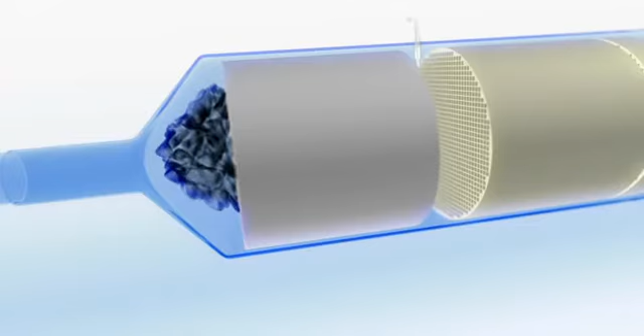The harmful gases produced by the heavy-duty diesel engines are purified in the exhaust after-treatment system, consisting of a diesel particulate filter for the soot particles and a selective catalytic reduction catalyst, also called SCR, for the nitrogen oxides. BASF engineers are working jointly with their customers at the truck manufacturers to improve the performance of the whole exhaust after-treatment system by providing the latest catalyst coating technologies as an active interface between substrate and exhaust gas.

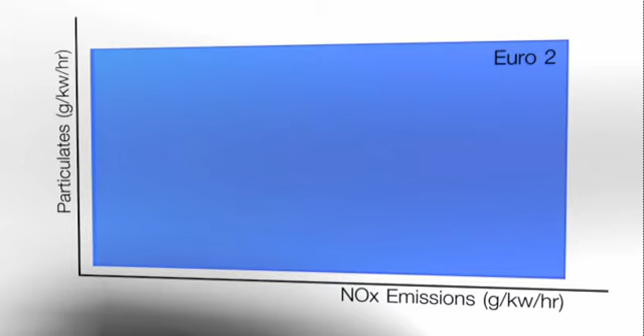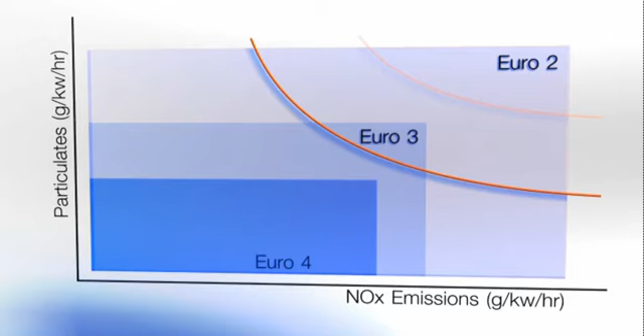Truck manufacturers have accomplished the reduction of raw emissions, mainly by increasing the diesel injection pressure and turbocharging. In addition, they have managed to reduce nitrogen oxide emissions by applying exhaust gas recirculation to cool the combustion process. For Euro 4, the majority of heavy-duty truck builders have chosen selective catalytic reduction by AdBlue. SCR technology allows for the optimization of fuel economy while meeting particulate emissions via engine control without a filter.

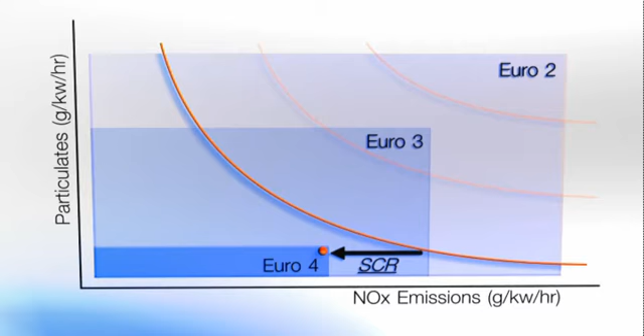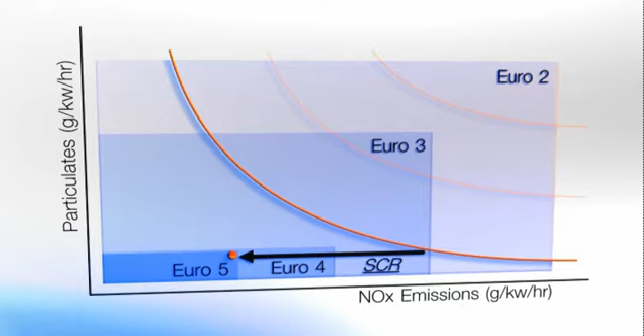To meet the even tighter Euro 5 standards, the same engine calibration is desired with an improvement of catalyst performance of 10 to 15% in nitrogen oxide control. This is a typical challenge for BASF engineers and could be accomplished by the introduction of new improved SCR emission technology. Euro 5 compliant trucks with BASF SCR technology are available on the market now.

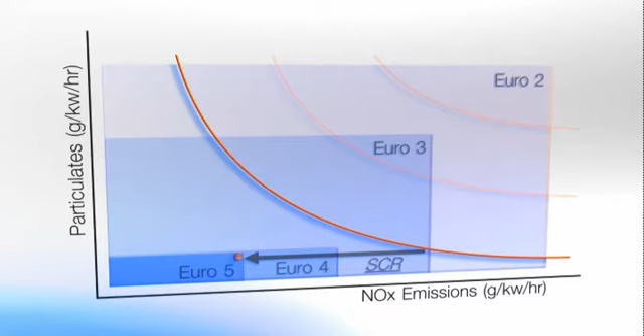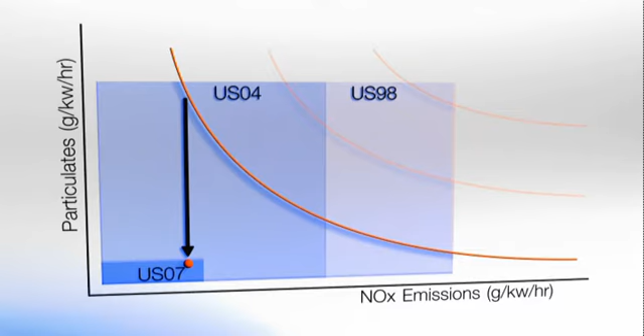In the U.S., truck manufacturers have chosen a different way to meet tighter regulations, coming into force at the beginning of 2007. All of them have chosen to control nitrogen oxide by engine management and will use diesel particulate filters to control soot emissions. The continuous regeneration of the filter is enhanced by a catalytically active coating provided by BASF for such application. This is known as a CSF, or catalyzed soot filter. In addition, active regeneration of the filter is required to force periodic particulate burning at temperatures above 600 degrees Celsius.

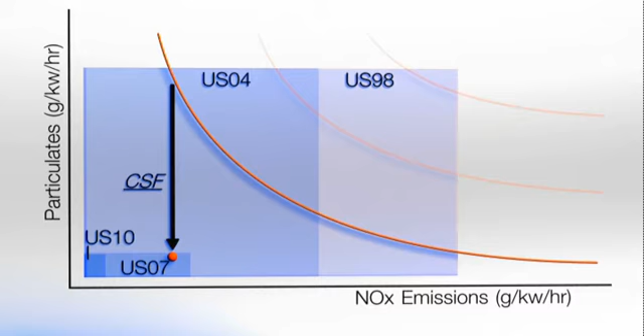Only 3 years after the introduction of the US 07 regulation, the US 10 emission standards will come into force, challenging the truck manufacturers to reduce nitrogen oxide emissions by a further 80%. BASF already has the equivalent emission technologies in place, in this example by combining the catalyzed soot filter with the SCR nitrogen oxide reduction technology. Ideally, many truck manufacturers would like to carry over as much of the US 07 emission after-treatment technologies into the US 10 solution by adding the SCR technology as nitrogen oxide control to the US 07 emission system.

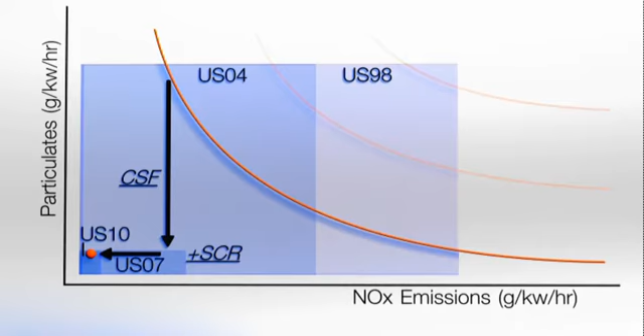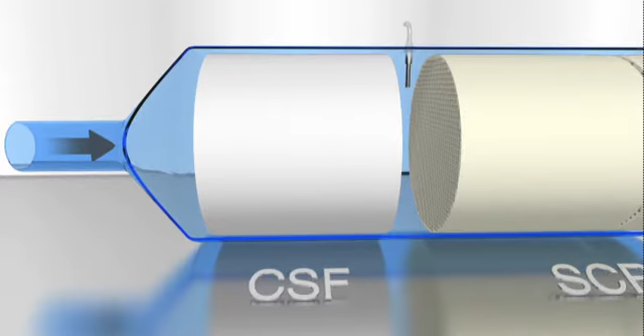Let us now investigate what will happen with the emissions of an advanced diesel engine in such a future exhaust after-treatment system and start with the catalyzed soot filter. The catalytically active material is coated on the ceramic substrate in a specifically developed process for wall flow-through filters. 2 channels are shown as an example to show the processes in the filter.

During the highway and long-distance duty cycle, the temperatures in the filter will be between 300 degrees and 450 degrees Celsius. First, we show the soot buildup, starting with the rear section, and then we show the layer of soot on the channel walls. Under these driving conditions, nitrogen oxide, NO, is formed. NO reacts with oxygen in the exhaust gas. The blue flashes show the reaction. This reaction, NO going to NO2, takes place only in the presence of a catalyst.

NO2 is a very reactive gas. It is able to reduce the accumulation of soot or even to burn off the soot, as shown by the red flashes. The catalyst can oxidize NO, which arises as an intermediate product during the soot burn-off, back to NO2. A circular process takes place that increases the rate of soot burn-off in the catalyzed filter.

In contrast to highway driving, city driving requires special engine operation in order to produce temperatures of 600 degrees Celsius, which are required for the soot burn-off. Assume that a layer of soot is already present as the result of previous driving. During city driving, this soot cannot be removed under normal operation by reaction with nitrogen dioxide.

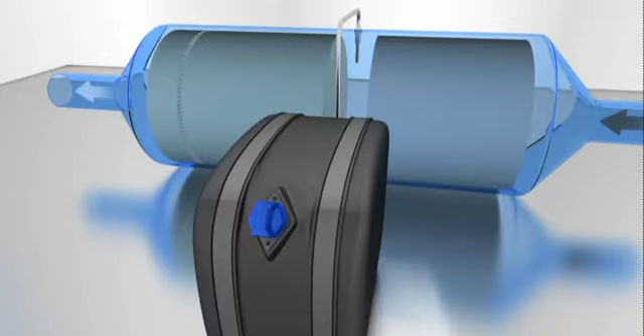Now that 95% of the soot particulates are removed, the emission gas still contains considerable levels of nitrogen oxides, which will be removed in the following SCR system. The SCR system consists of the separate AdBlue tank, easily recognizable by the blue tank cap, the AdBlue dosing unit, and the downstream SCR catalyst.

Soon after the filter, AdBlue by BASF, a highly pure solution, is injected into the exhaust system. The amount injected is mainly dependent on the speed and load of the engine. The temperature of the exhaust gas converts AdBlue by BASF into ammonia that will remove the nitrogen oxides in the following SCR catalyst.

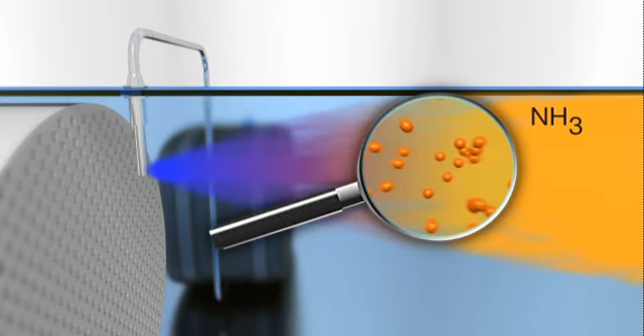Depending on the amount of NO2 provided by the upstream catalyzed soot filter, the following two reactions take place in the SCR catalyst. Nitrogen oxide and ammonia react in equal amount to water and elementary nitrogen, a natural ingredient of the air we breathe. The reaction is relatively slow, and thus at temperatures around 200 degrees Celsius, conversion rates are low.

The so-called fast SCR reaction is at temperatures of 200 degrees Celsius 10 times quicker than the first reaction, but only takes place when nitrogen oxide and nitrogen dioxide are present in equal amounts on the SCR catalyst. In this case, they react with the same amount of ammonia to elementary nitrogen and water. The nitrogen dioxide rate at the engine outlet is relatively low, typically 5 to 10%. However, the upstream catalyzed soot filter has produced sufficient nitrogen dioxide to enable the fast SCR reactions.

BASF offers an application engineering service to the truck manufacturer to adapt the catalyst technologies to the customer emission systems in a way that the right amount of excess nitrogen dioxide after the catalyzed soot filter is produced to enhance the fast SCR reaction on the SCR catalyst in as many engine speed and load points as possible.

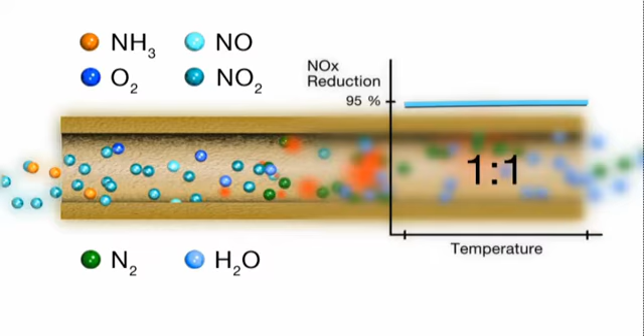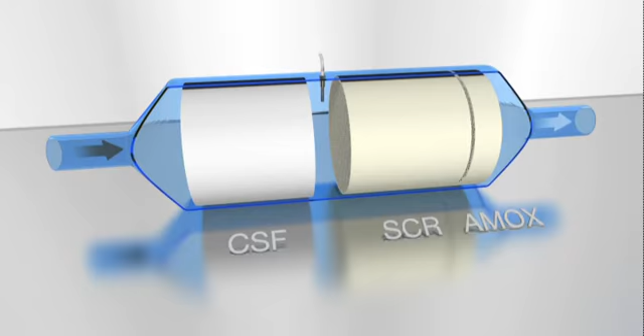With the new high-temperature stable non-vanadium SCR technologies from BASF, truck manufacturers can carry over US 07 filter regeneration strategies without significant further modification and are able to place the SCR converter behind the filter, because the second generation of SCR technologies can withstand temperatures in excess of 700 degrees Celsius. After the SCR catalyst, up to 95% of the nitrogen oxide emissions are reduced to elementary nitrogen and water.

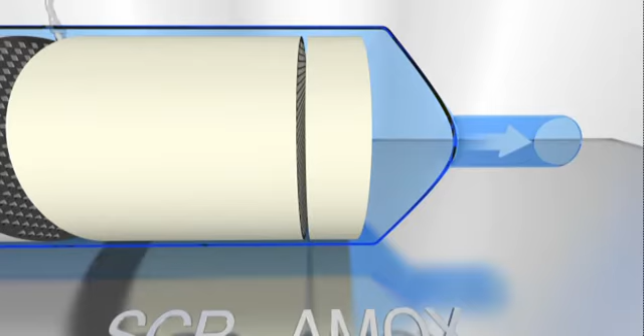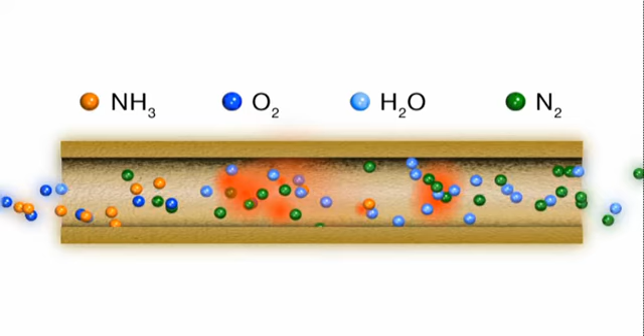Due to the ever-changing speed and load points, control of AdBlue dosage is very complex, and it may occur that too much ammonia is exposed to the SCR catalyst and leaves the SCR catalyst. A small ammonia oxidation catalyst added to the end of the SCR catalyst offers two significant advantages to the truck manufacturers. Firstly, excess ammonia is securely converted to elementary nitrogen and water. Secondly, it allows the engineers to have more freedom in the urea dosing control and thus achieve more NOx reduction performance out of the SCR system, which in turn can be used to reduce the size of the SCR catalyst.

BASF emission technologies for heavy-duty vehicles make a decisive contribution to the continued maintenance of air quality. Together with our customers and partners in the automobile industry, we make sure through innovative products that future emission standards will be met.